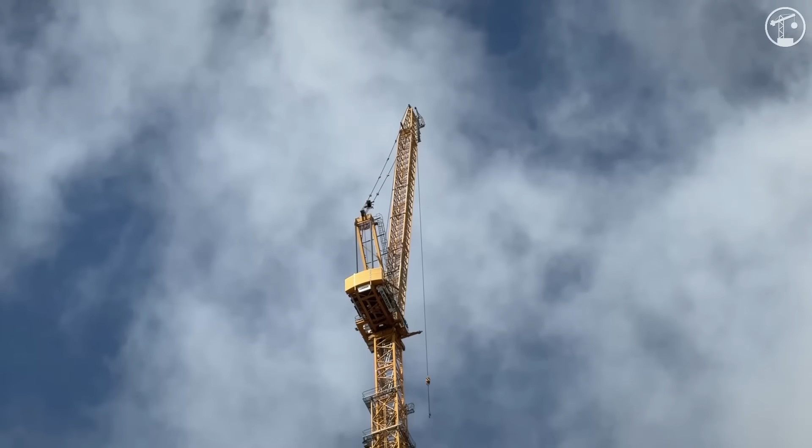What if I told you the tallest building in Texas is going up on a street that didn't even have sidewalks 15 years ago? Less than 2 decades ago, if you wandered down these streets in Austin, you'd find weathered bungalows, backyard bars, and the occasional auto shop. No glass towers, no construction cranes, just a laid-back pocket of the city with more culture and history than height.

Fast forward to today, and one of the most ambitious mega projects in Texas is rising from that very spot. It's called Waterline, a 1,025-foot skyscraper that's not just breaking records, but changing the rules for what downtown Austin can be. This is a story of how one of the city's most unlikely neighborhoods became the launchpad for a vertical revolution, and how a single tower could help reshape Austin's very uncertain future.

The early 2000s saw Austin's population begin to explode, driven by a surge of tech companies setting up regional offices, a flourishing startup scene, and a growing reputation as a livable, creative city. The growth has even got so chaotic that in 2024, the metro area was welcoming nearly 160 new residents per day, and you could probably imagine the unprecedented demand for infrastructure that requires.

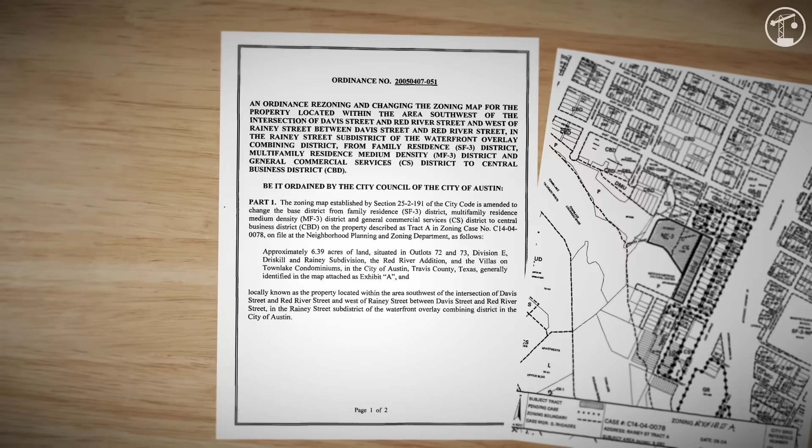Back in 2005, in recognition of its potential, city planners rezoned Rainey Street from a residential area to part of the central business district. This one decision opened the floodgates for high-density development. Developers could now exceed the old 40-foot height limit, provided they offered some sort of public benefits. Suddenly, downtown's east side, specifically along Waller Creek, became fertile ground for skyscrapers.

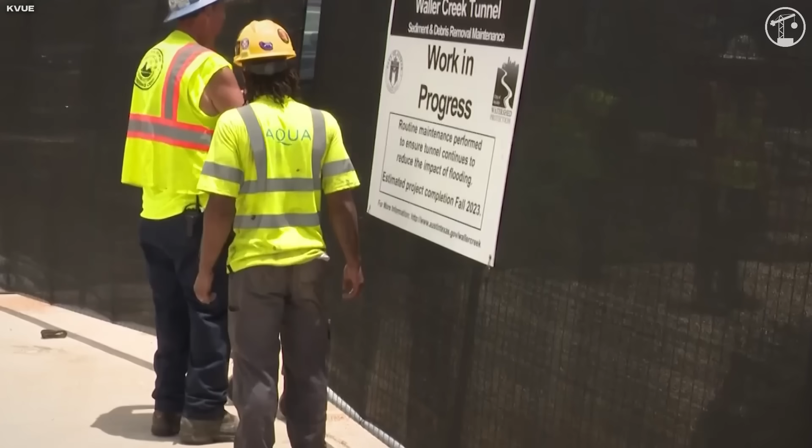At the same time, Austin embarked on an ambitious effort to revitalize Waller Creek itself. Long regarded as a neglected waterway prone to flash flooding, the city developed the Waterloo Greenway, which turned the creek into an amenity rather than a risk. And by the mid-2020s, parcels nearby were some of the city's most desirable and expensive pieces of real estate.

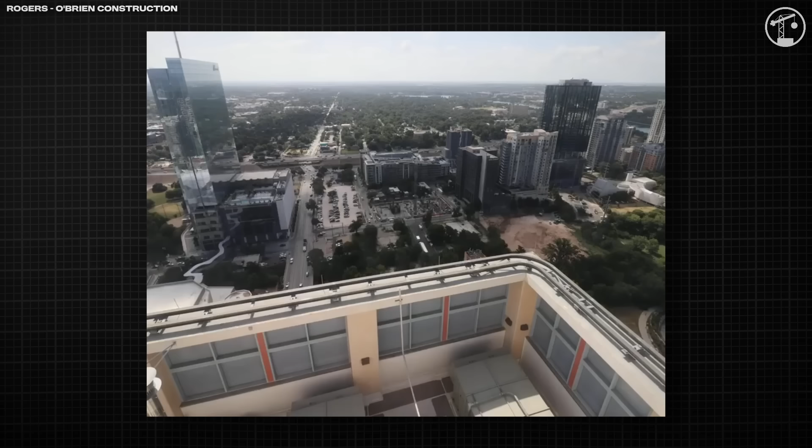It was at this opportunistic intersection that Lincoln and Kilroy stepped in. Their proposal for Waterline wasn't just tall, it would stitch together downtown and the Rainey District, tying into the Greenway and extending the public realm through trails, plazas, and bridges. It was a skyscraper shaped as much by the city beneath it as by any global design trend. At 2.7 million square feet, Waterline is effectively a vertical neighborhood.

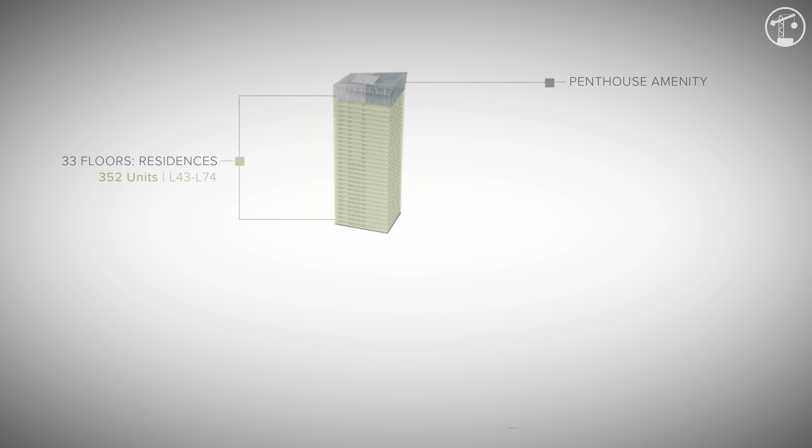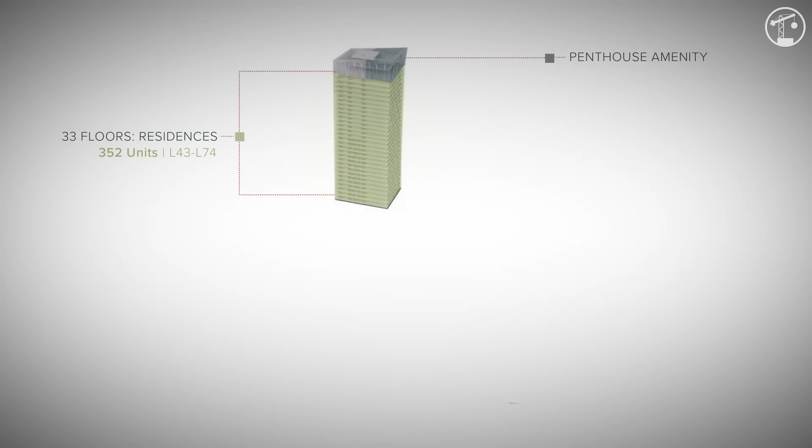The upper third of the building, from floors 43 to 74, will feature 352 luxury apartments, offering 1 to 3 bedrooms. Every unit is designed with floor-to-ceiling glass and unobstructed views of the lake and downtown skyline. Residents will also have access to 2 dedicated amenity levels on floors 41 and 42, which will include 23,000 square feet of indoor lounge, fitness, and co-working space, plus another 20,000 square feet of outdoor terraces.

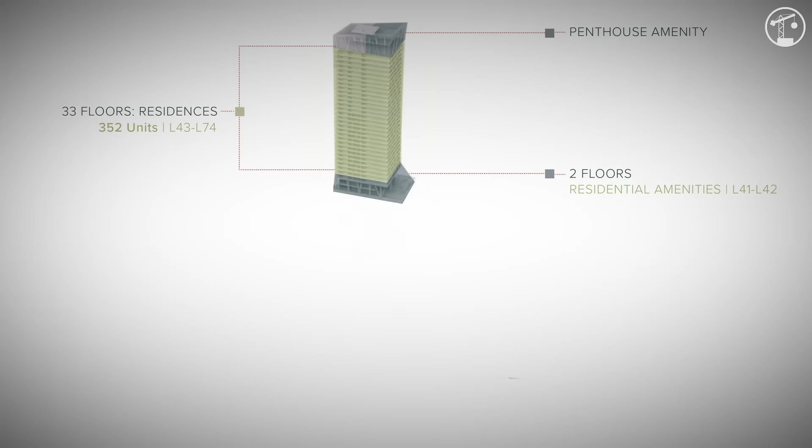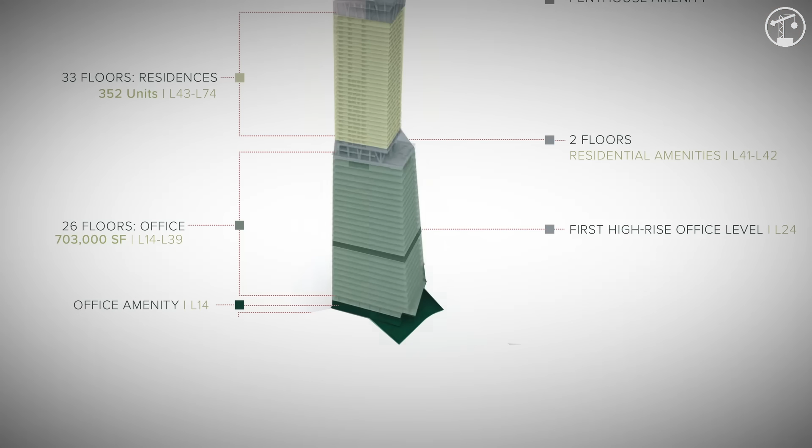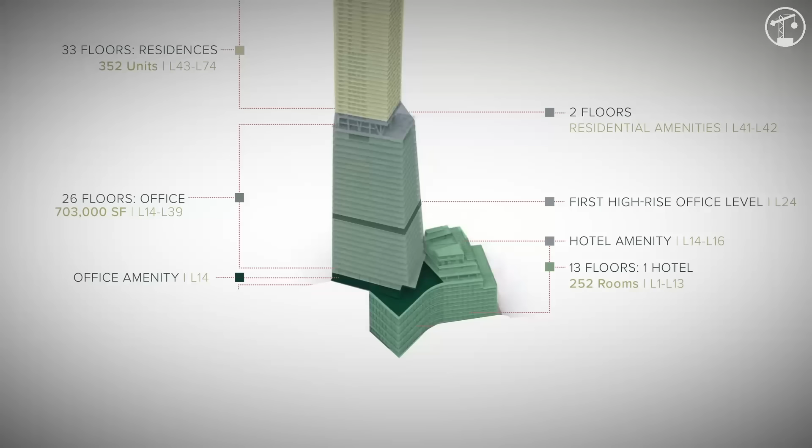Behind the hotel, a multi-level parking garage will support residents, office tenants, and hotel guests. And at the street level, 24,000 square feet of retail and restaurant space will spill out onto a landscaped public plaza directly connecting to the Waterloo Greenway.

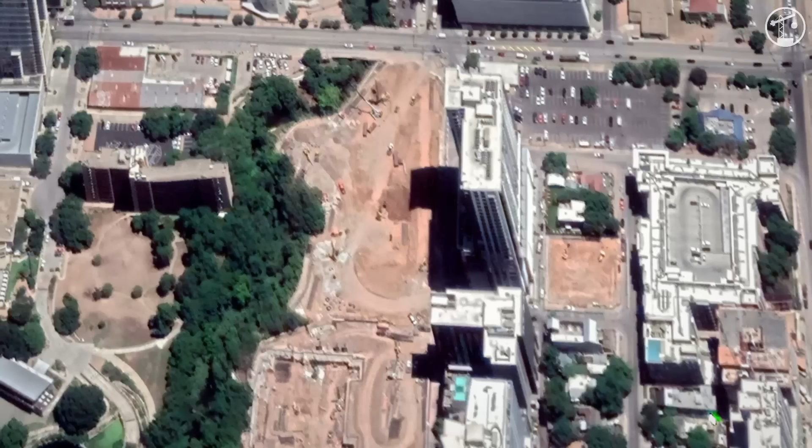The design challenges of this tower are impressive, but perhaps most striking is the use of 9 sculptural megacolumns at the base of the building. Each stands between 30 and 53 feet tall and was cast in place using over 70 cubic yards of high-strength concrete. Each column includes more than 22,000 pounds of number 18 rebar, the thickest steel typically used in high-rise construction.

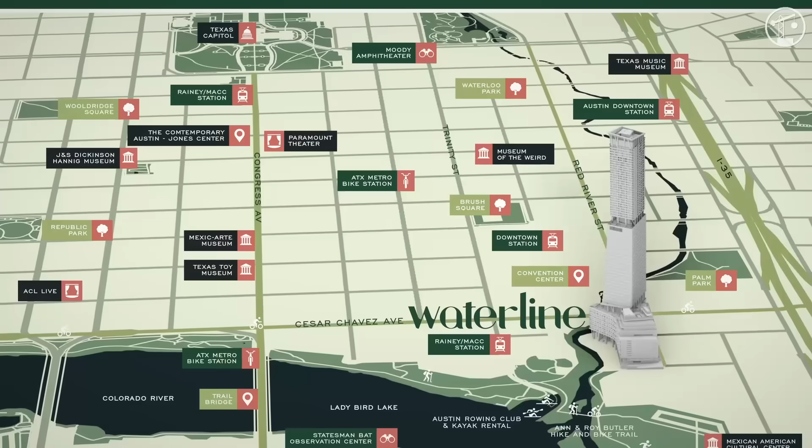These columns lift the building's 3-story lobby more than 30 feet above street grade, allowing floodwaters to pass beneath the structure and maintaining public access to the creek and greenway. The columns also support the massive structural load of the tower while preserving visual openness at the pedestrian level. It's a solution that's both resilient and architecturally expressive.

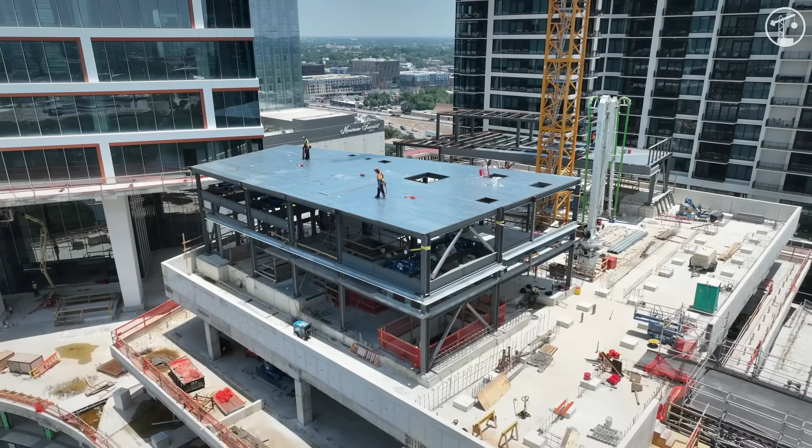Because the tower is so slender and tall, wind and seismic design are critical. The structural system features a reinforced concrete core, paired with a perimeter moment frame and belt trusses placed at mechanical levels. This design resists high wind loads and ensures that occupants on even the highest floors won't feel too much of an uncomfortable sway. The tower's spandrel glass panels reduce solar gain, while native Texas limestone veneer panels provide aesthetic contrast with the glass.

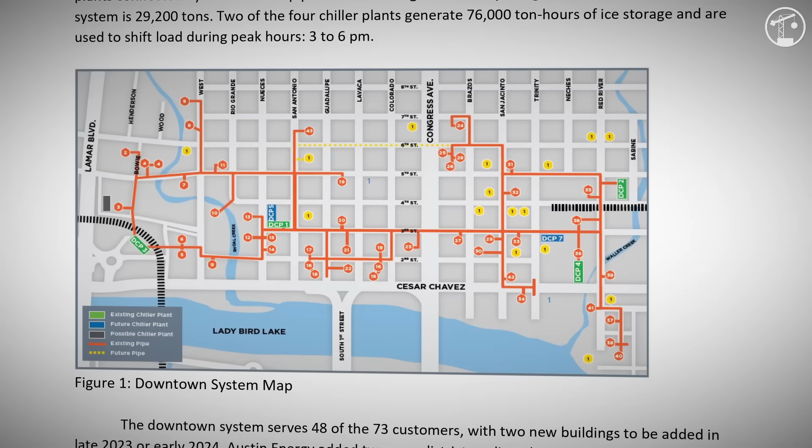The building's also connected to Austin's district chill water system via 2 new 18-inch lines laid beneath nearby intersections. The general contractor is boosting efficiency by using a single tower to lift materials and people all the way up to level 74, supporting multiple oversized hoist vehicles custom built for the project. This setup lets them avoid delays from traditional hoists, which would block exterior work until fully removed.

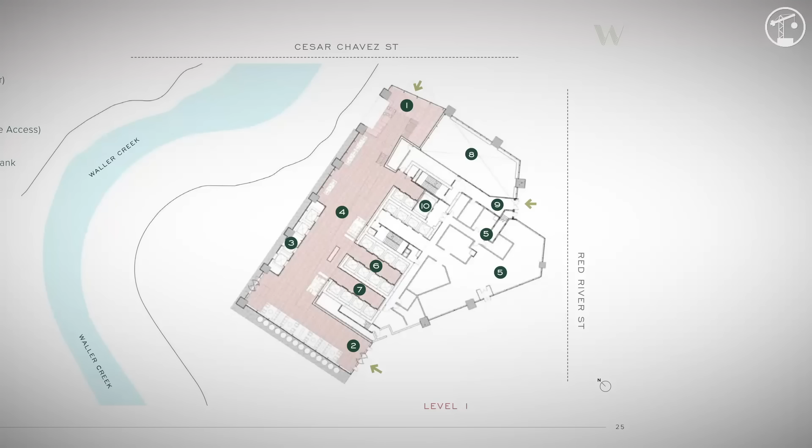Once the building is completed, it'll offer 22 total passenger elevators, with 6 serving the garage and 2 groups of 8 serving the low and high rise.

At 1,025 feet, not only does the tower surpass every other building in Texas, including Dallas's 921-foot Bank of America Plaza, Houston's 992-foot Wells Fargo Plaza, and 1,002-foot JP Morgan Chase Tower, but it also finds itself in the top 25 in the US. If it were completed today, it would sit between the Spiral in New York City and Bank of America Plaza in Atlanta. And for probably better reference, it's just 20 feet shorter than the Chrysler Building.

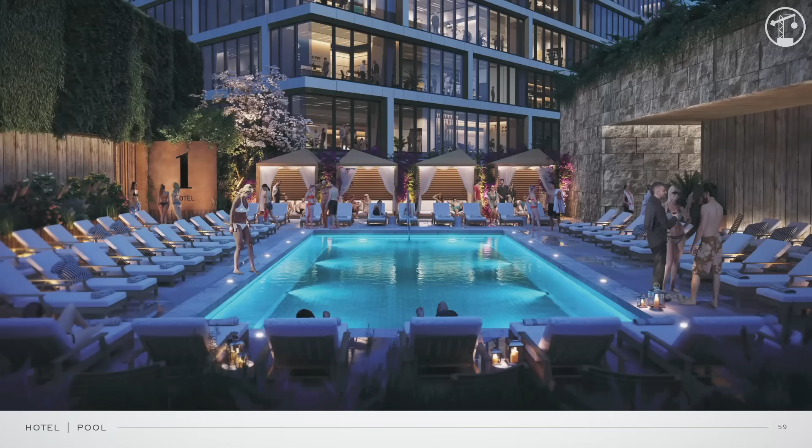But what about the cost? When Waterline was first proposed in 2021, city filings placed the total cost at around $520 million. On the positive side for Austin residents, from all my research, it looks like the project won't receive any public money. I'm still a bit hesitant to accept this, but if true, this independence gives the developers more control over design and timeline, but obviously comes with greater financial risk. As with many large-scale projects that we've covered at Buildcore, the risk profile is heightened by potential fluctuations in interest rates, material costs, and labor availability.

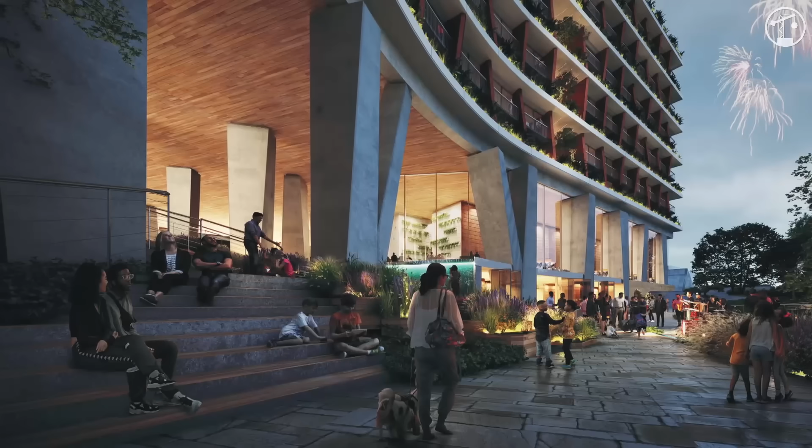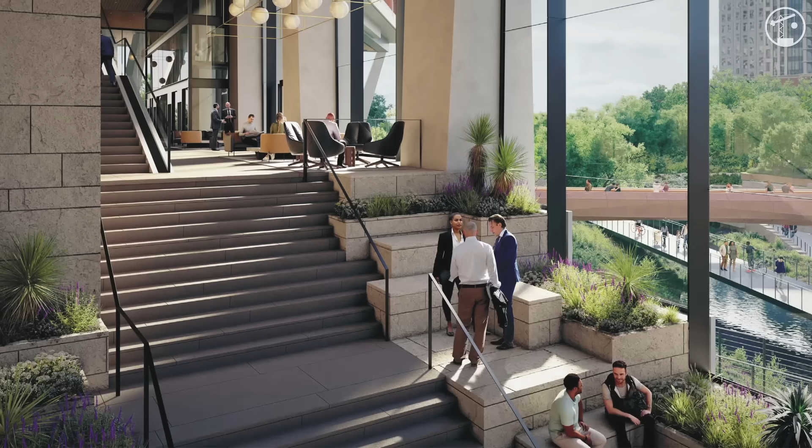At peak activity, the site hosts over 875 construction workers daily, including crane operators, iron workers, and electricians, to name a few. Once the building is operational, it'll support hundreds of permanent hotel, retail, and hospitality jobs, not to mention all the office jobs. But the real legacy may be its contribution to Austin's public realm. In addition to the building itself, Waterline's developers have pledged $1 million toward Waterloo Greenway improvements, including 2 new pedestrian bridges over Waller Creek and 3 additional access points through the trail system.

As of mid-2025, Waterline is around 75% complete. Ground was broken in June 2022, including the placement of deep piles socketed into the Austin Chalk Formation, wrapped up in 2023. The tower's podium topped out in 2024, and by early 2025, the steel frame had surpassed the 66-story 6th and Guadalupe Tower, previously Austin's tallest. And as of early August, the final beam was lifted into place. Now, with the tower finally reaching its desired height, the structure dominates the skyline. Even when I was around 20 miles away driving into the city, it was hard to miss.

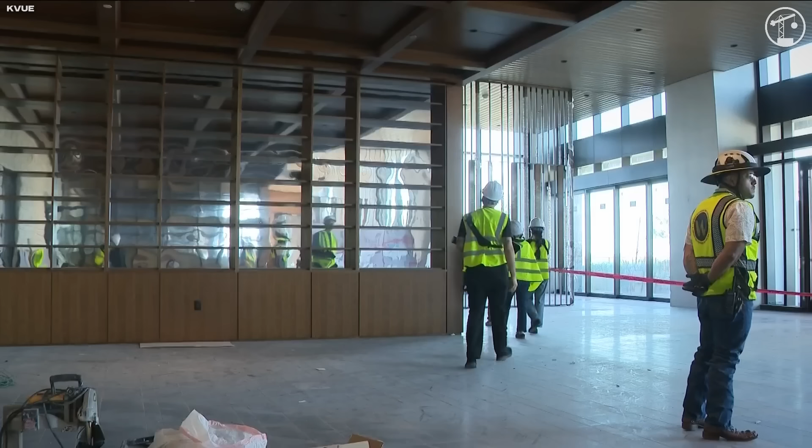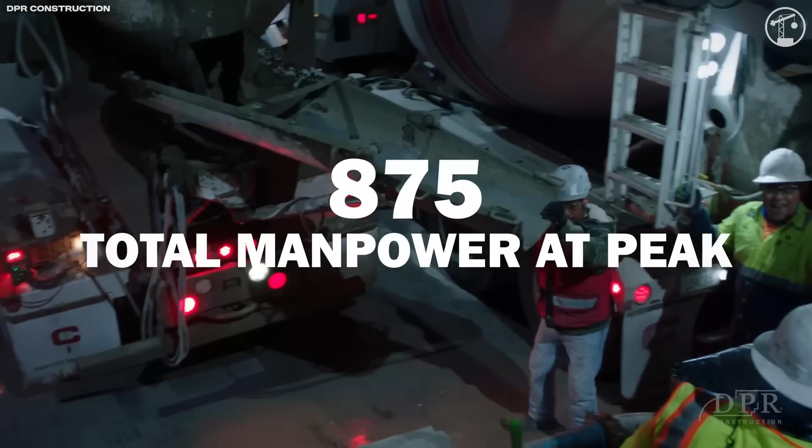But in terms of trying to deliver the tower in time with expectations, there have been some issues. The glass panels were delayed by 6 weeks due to international supply issues. Labor shortages in the trades have required out-of-state crews to supplement the local workforce. And final permitting, especially related to the building's floodproofing systems, will require coordination across several city departments. Nevertheless, the developers are holding to their timeline, with the hotel portion slated to open in April 2026, the office in July, and the multifamily portion by September. Any significant delays could push delivery into early 2027, with ripple effects on leasing and hotel bookings. But for now, the developers seem to remain optimistic.

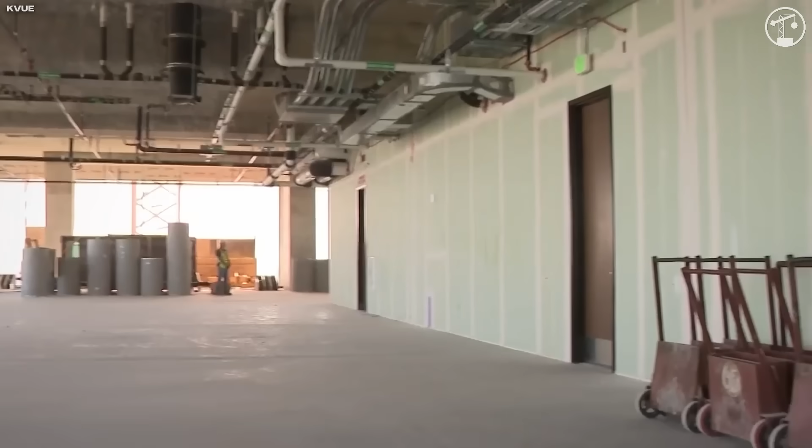But there is another, potentially larger issue looming over the project. While Waterline's office floors are designed to attract premium tenants, Austin's office market has recently hit a rough patch. Vacancy rates downtown have climbed above 26%, and even top-tier Class A buildings are feeling the pressure. Tech giants like Meta have pulled out of planned leases, while others like Google have slowed their local expansion. With over 2 million square feet still under construction citywide, demand just isn't keeping pace. And as of mid-2025, no anchor tenants have signed for the tower's space.

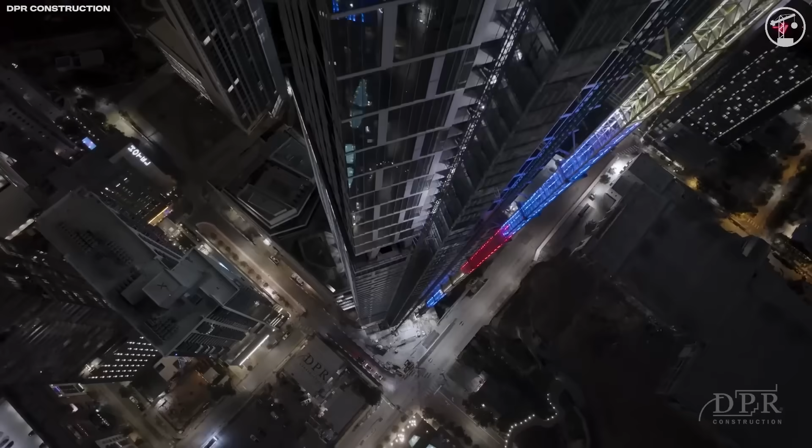Waterline Tower is a marker of what Austin has become, a fast-growing, tech-forward city that's embracing height, density, and connectivity. As the tallest structure in Texas, it will cast a literal shadow across downtown, but also a symbolic one across the state's approach to urbanism. When the lights hopefully turn on in late 2026, Waterline won't just change the skyline, it'll change the way the world looks at Austin.